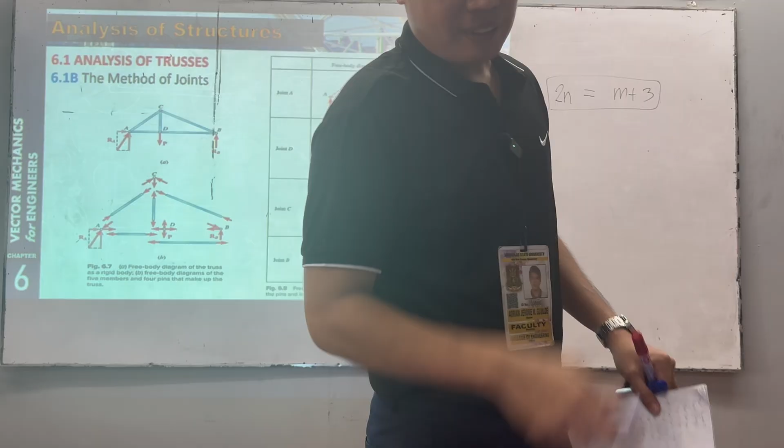So, in analyzing trusses, there are two approaches we can use. One is the method of joints and the other is the method of sections. Let's discuss first how to use the method of joints.

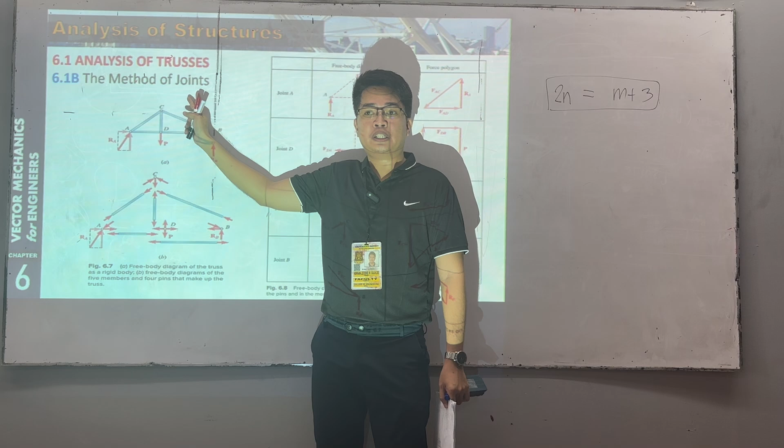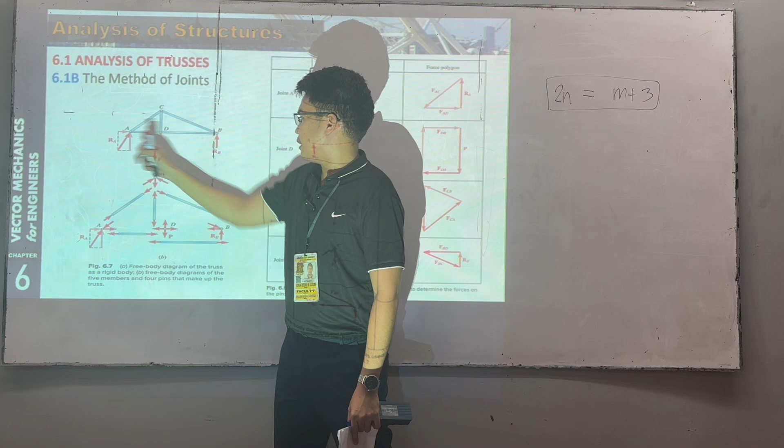For example, we have here our structure. We got RA and RB, right? We can get those using summation of moments and then summation of forces along X and along Y.

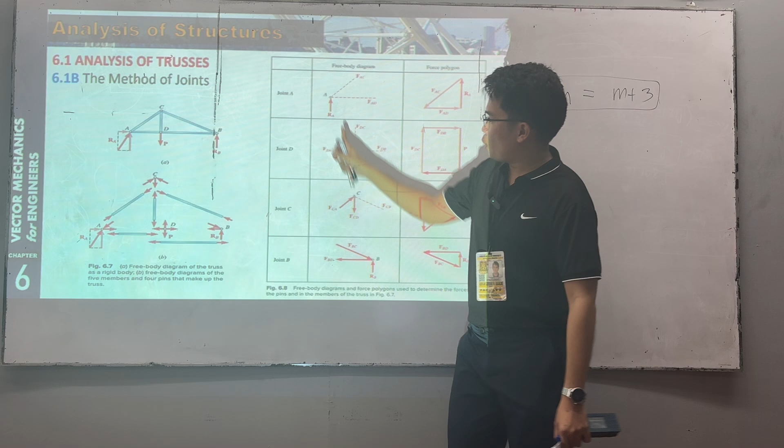The internal forces, so that's unknown. Now, knowing that RA is going up, what would FAC be? Towards there or towards there? Going down, right? In order to oppose RA.

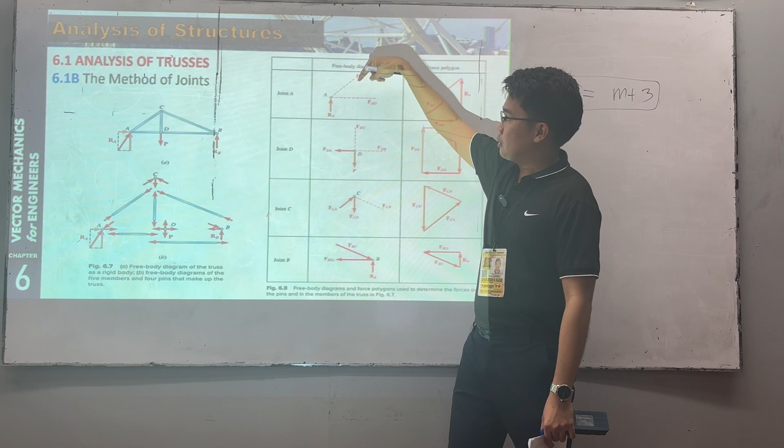How about FAD? To the left or to the right? To the right. Because if this one is going downward, its component along X is to the left. So therefore, FAD should be to the right.

Clear? Now, we have three forces involved here. So what can we use? We can use the component method or the triangle method. Using either of these, we can solve the unknowns there.

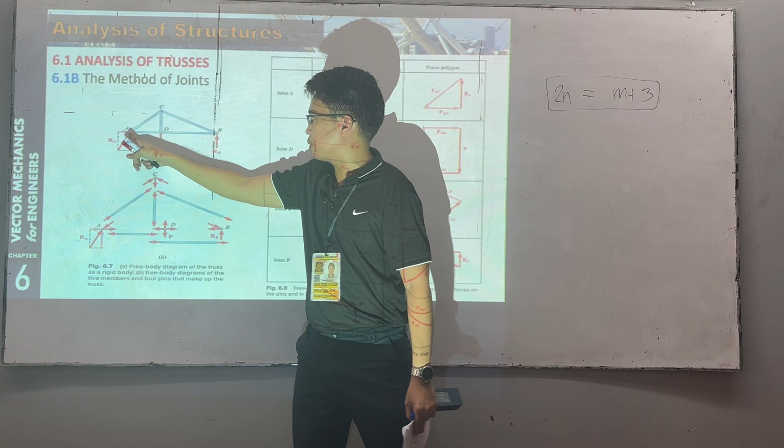So after we solve joint A, we get these forces. Let's proceed to the next one. It's either D or C. So here, he started with D.

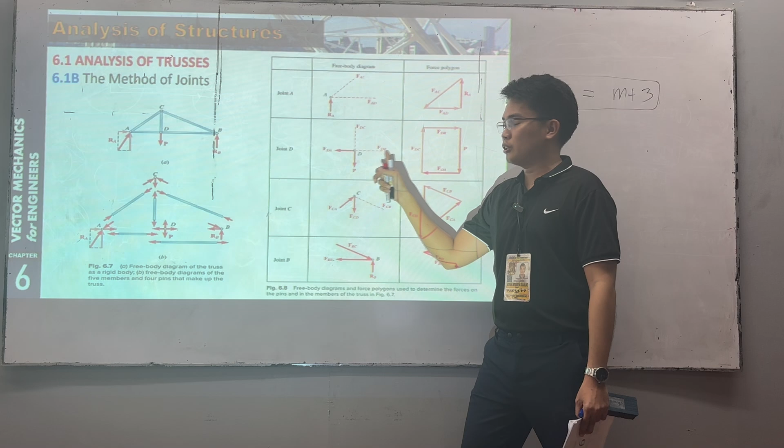By the equilibrium equation, summation of forces along X, FDA is equal to FDB, but opposite in direction, right? By common sense. So this one is also going down, so this one is going up.

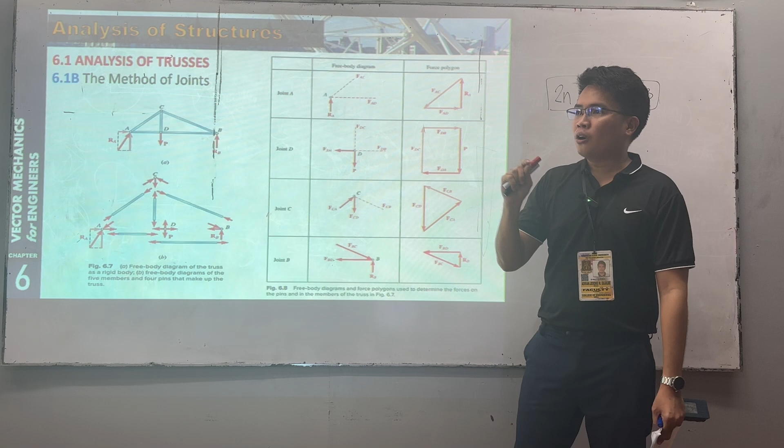So that's it, clear? The strategy you'll always do here is to start at the joint wherein there are only two unknowns. Because once it exceeds 2, let's say 3, what equations can we use at our joint? Summation of forces along X and summation of forces along Y.

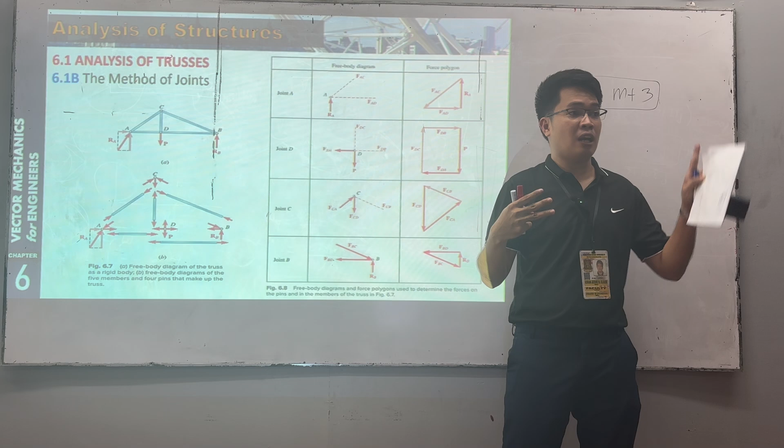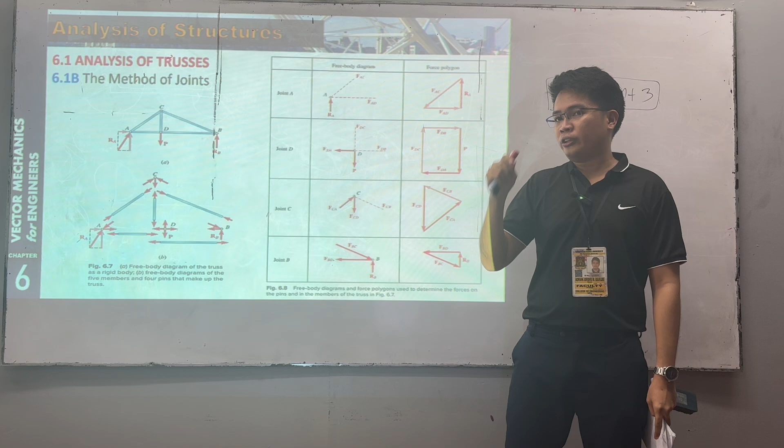Only two equations. If we have 3 unknowns and 2 equations, is that solvable? No. That's why you need to find a joint wherein there are only two unknowns. So always start at a joint with only two unknowns, then proceed to the next joint, which is either D or C.

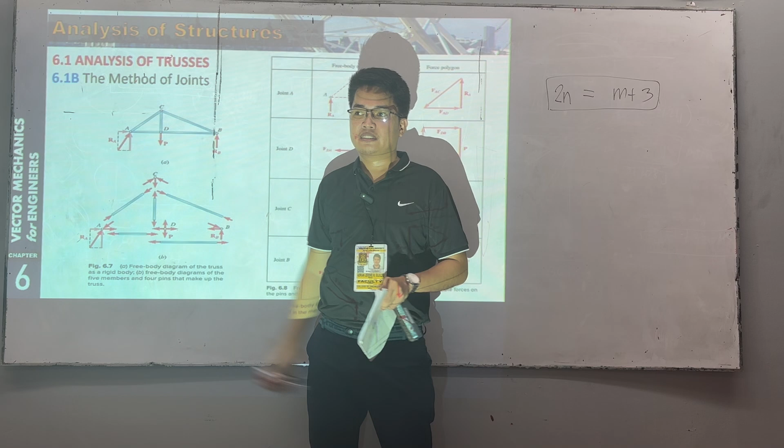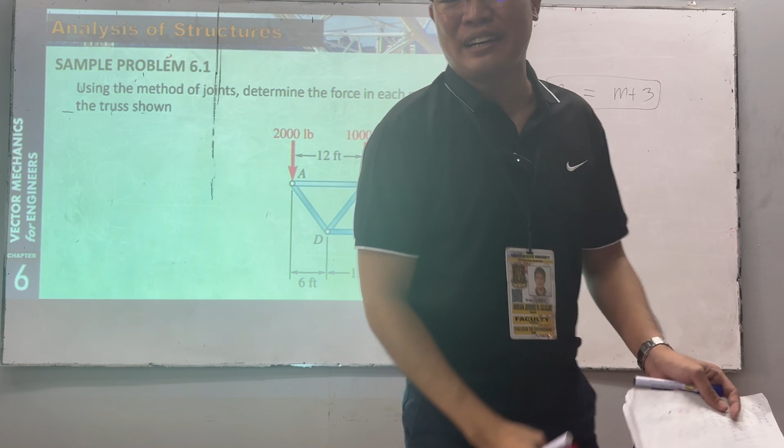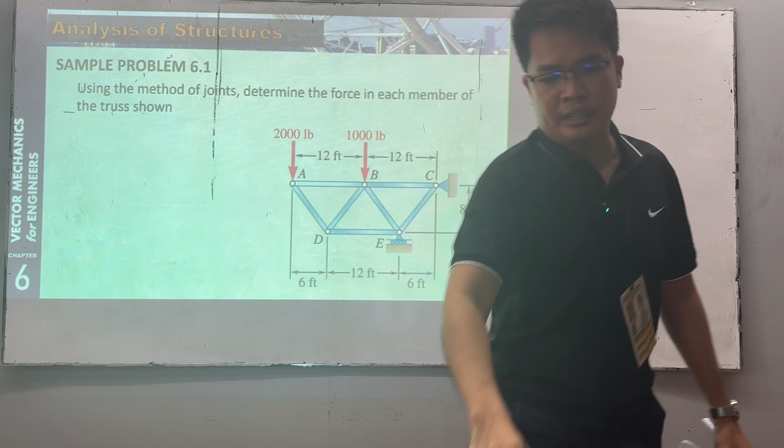We have this one. We have a pin connection. How many reactions do we have? Two. This one, we have one. So if we draw the FBD, we have this. So how do we get E?

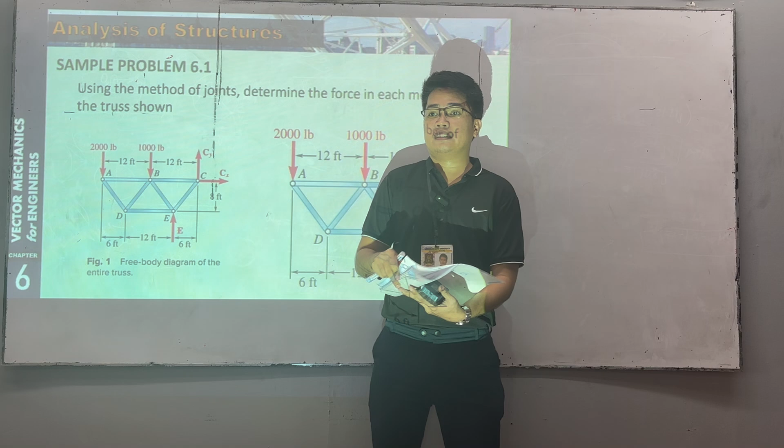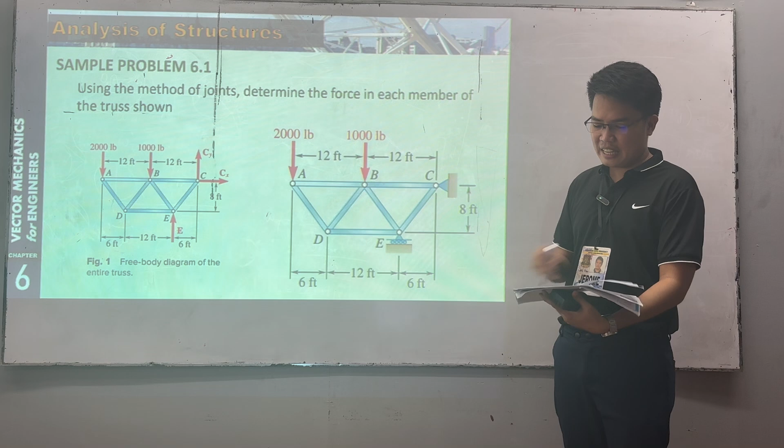Anong equation? Summation of moments, dito marami yung unknown, point C. So makukuha natin si E. Now paano makuha si CY? Summation of forces along Y. How about CX? Summation of forces along X.

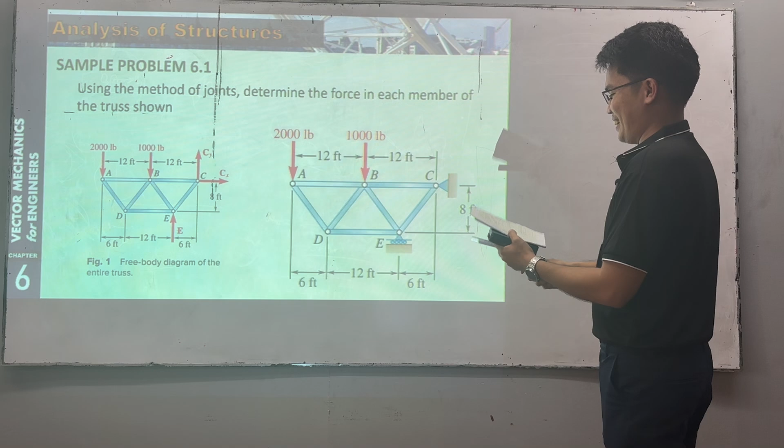Assuming nakuha na natin, no? Master nyo na to, hindi na natin ito i-solve. Assuming na master nyo na yan, simple naman, summation of moments dito, makukuha si E, di ba? I-solve pa natin to, wag na. Diretso na. So we have our E here equal to, sabihin natin, 10,000

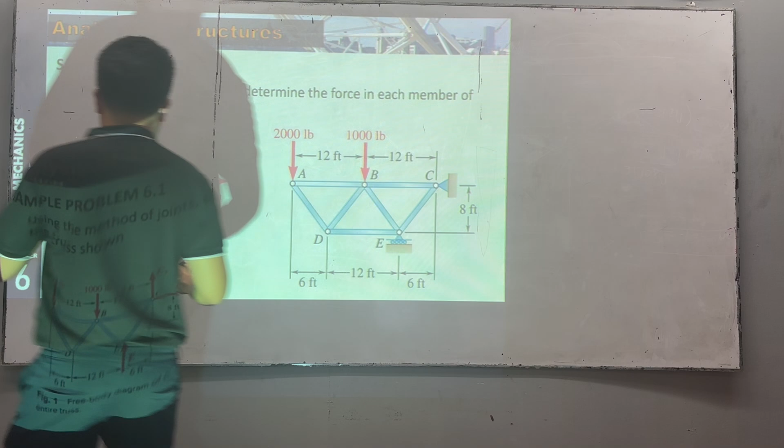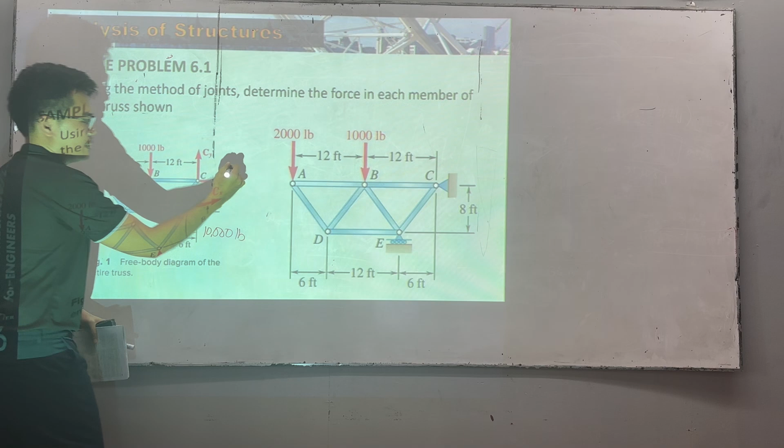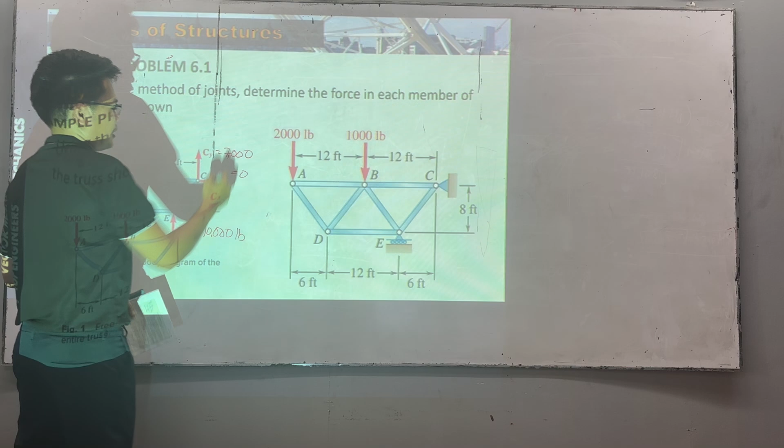pounds. And then yung CX natin dito, ano yung value ni CX? By looking at the figure, okay, 0. Si CY daw, sige daw, mental. Pila si CY? 5, 4, pila? 7,000. So ayan lang, no? 7,000 pounds. So okay, solve na tayo.

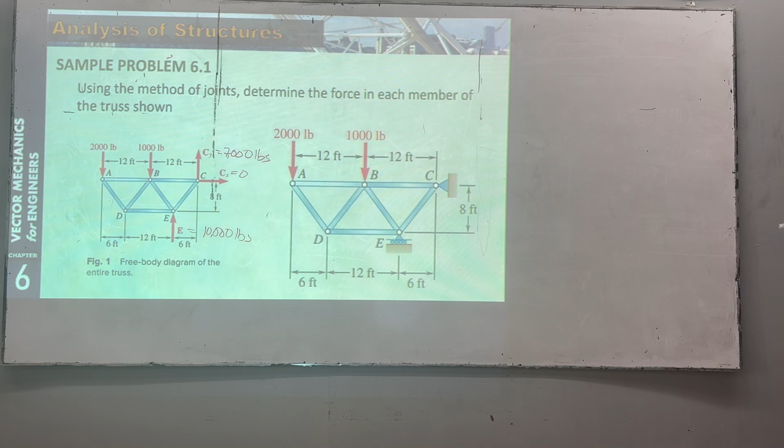So saan tayo mag-una mag-joint? Joint, we have, okay, pwede tayo sa point A, no? Kasi dalawa lang yung unknown, pwede natin yan gamitin. So at joint A, ano yung mga forces involved?

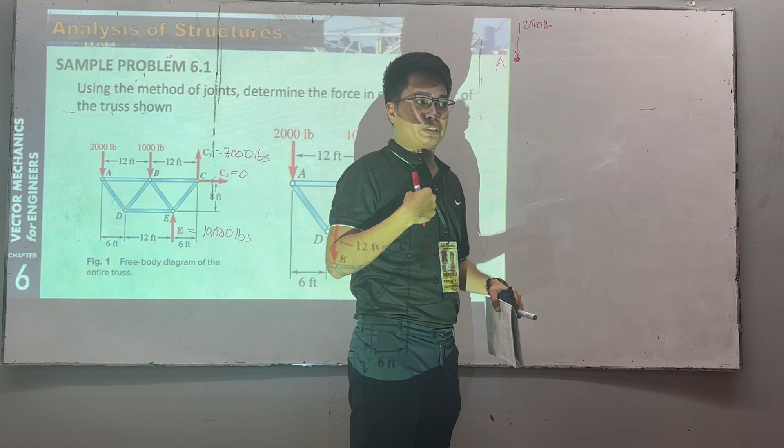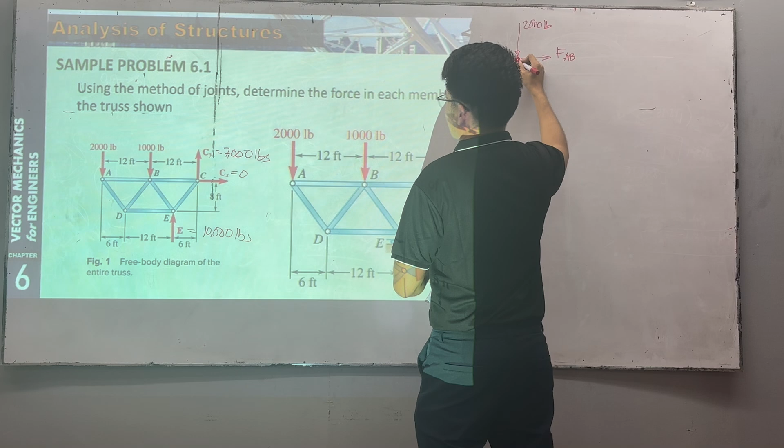We have going down na 2,000 pounds. And sa pag-solve natin dito, hindi pa natin alam yung internal force kung compression ba or tension, so i-assume muna natin na tension. Kung yung answer nyo is negative, ibig sabihin baliktarin natin yung direction. Tama? So going right is yung, anong force yan? FAB. And then going papunta doon, we have force AD.

So ano yung pwede natin gamitin dyan? Triangle, no? So we have going down na 2,000, and then we have FAB, dapat i-connect head to tail, no? So kung papunta doon, and then papunta doon, and then papunta doon. Tama? So we have here 2,000, this one here is FAB and FAD.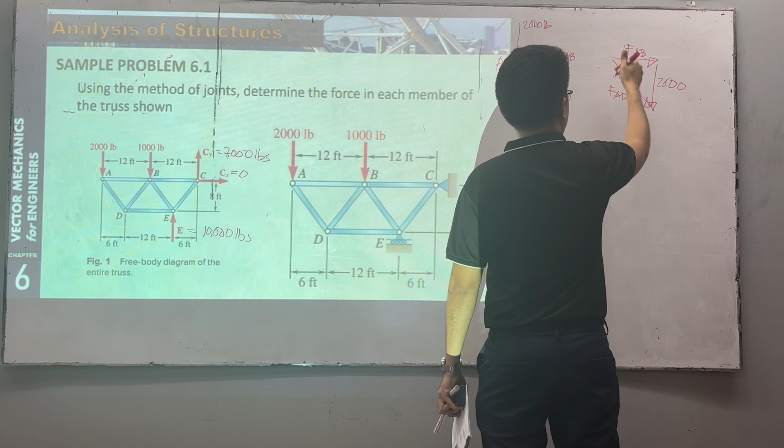So ano yung angle natin dito? We have dito is 8, and then papunta dito we have 6. Tama? So we have 8 at saka 6, so anong meron dito? Divide natin to by 2, we have 4 at saka 3. So this one here is 16, 25, we have 5. So ayan, follow lang natin.

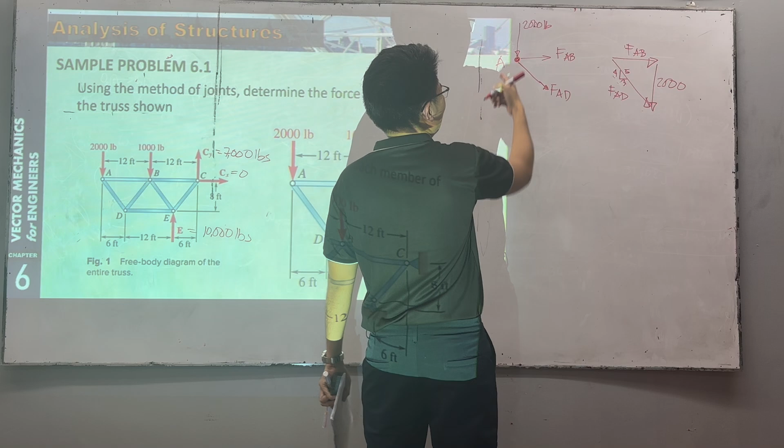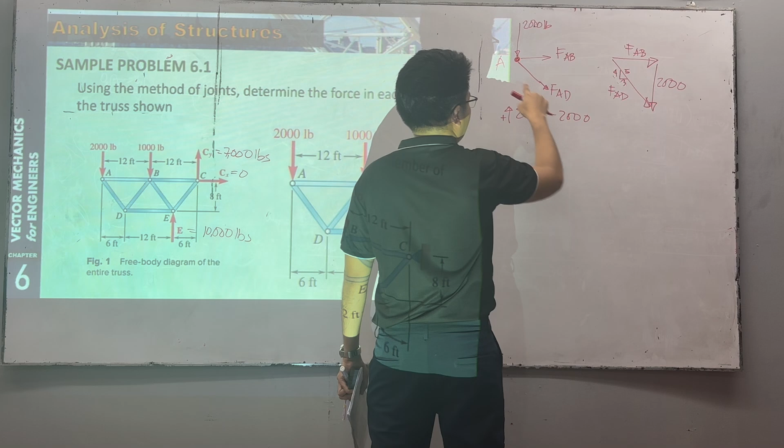Or pwede nga summation of forces na lang, no? Diretso. So summation of forces along Y, positive, positive yung upward. So we have here negative 2,000. And then ito siya is going downward, no? So we have negative FAD.

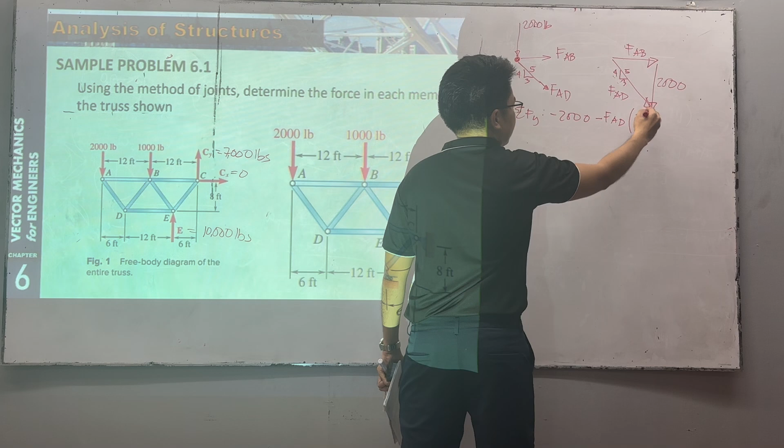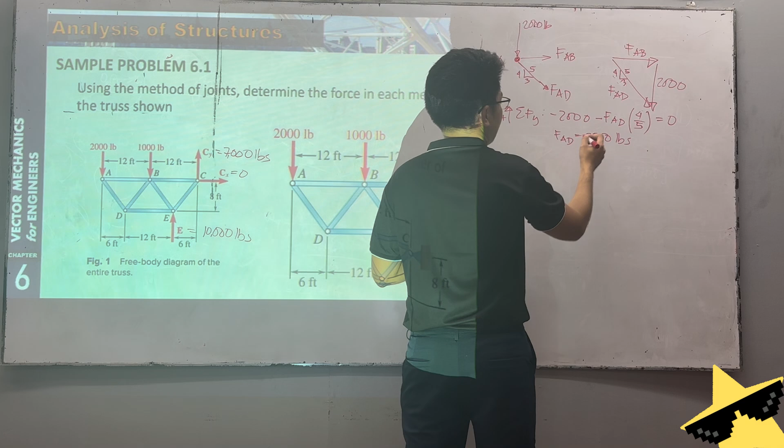And then ano yung ratio niya? Ito, we have 4, 3, 5. Tama? So since 4 siya, we have 4 over 5. Klaro? So this is equal to 0. So ano yung FAD natin dito? FAD dyan is negative 2,500 pounds.

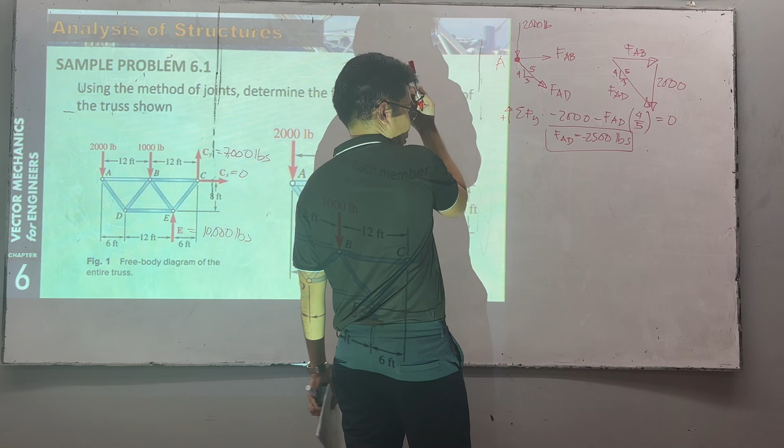And it's negative, no? So kung negative, yung direction natin should be opposite, no? So tanggalin natin to, ayan, so magiging positive yan. Ano na lang, or wag kayong mag-erase, kasi sa exam walang erasure. So yung answer natin dito, di ba, negative to, so ayan lang. Or pwede natin tong erase pala. Negative, kung direction niya papunta doon, lagyan lang natin ang direction na paganyan.

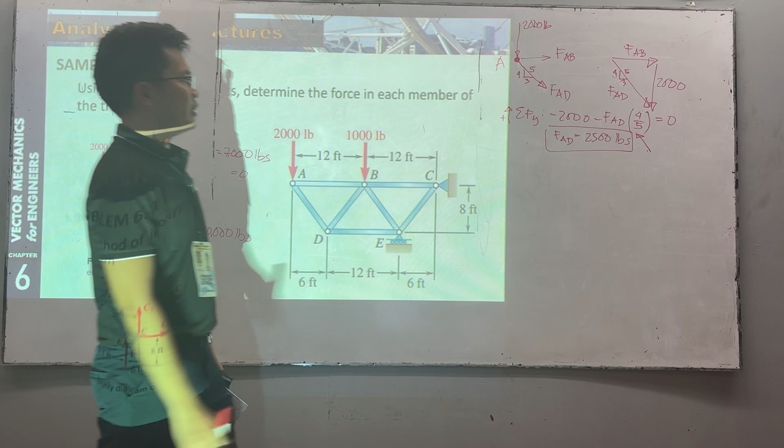Okay? So ayan lang. How about FAB? So summation of forces along X, positive papunta doon. So ano yung involved? We have FAB, and then we have here, ilan na siya? We have negative FAD is 2,500, no? 2,500 times 3 over 5 is equal to 0. Ay, positive pala, so ayan.

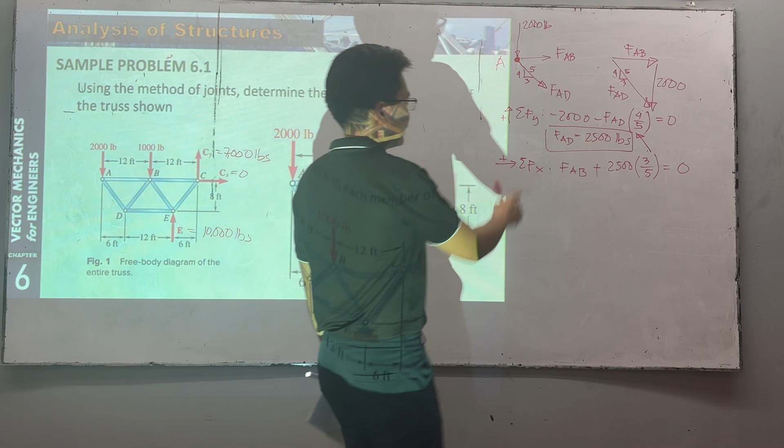Ay, hindi, yung nakuha nating FAD from this figure is negative, di ba? So we have plus yan, and then we have negative dyan. No? So ayan lang, wag kayong ma-confuse, kasi negative yung nakalagay dito. Assuming lang na hindi pa natin na-correct yung figure natin. So yung substitute niya ditong FAD is ito. So we have here our FAB is equal to 1,500 pounds. So ayan, nakuha na natin to.

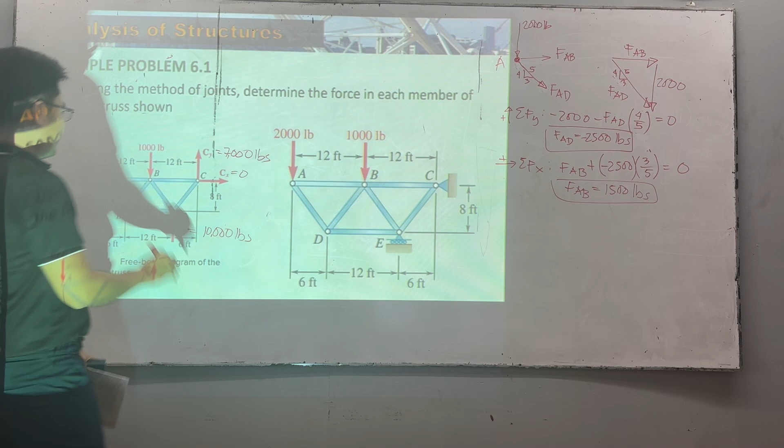So marami pa tayong kukunin, kaya pa? Sige na lang. So yung example na to, very simple but very tedious, no? Simple na kayong solution, dalawa lang, summation of forces along X, summation of forces along Y. Siya ma-zero sa exam. So ito lang, ano yung next? We have, sabihin natin, we have point B. So ito siya, anong meron dito? This is compression, no? So therefore, compression din to.